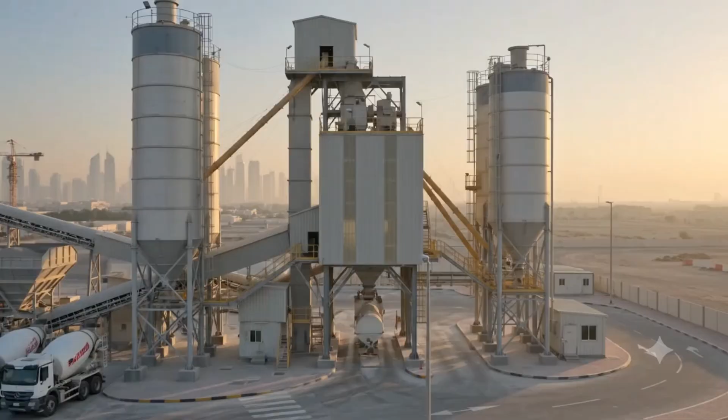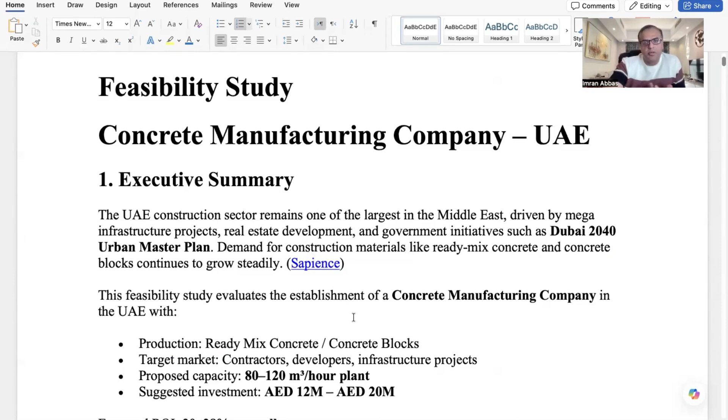The UAE construction sector continues to grow, with infrastructure projects and initiatives like the Dubai 2040 Urban Master Plan. This executive summary will give you an idea of how the sector is growing through 2040, and this link will help you find the growth rate of this industry. If you click it, it takes you to a page with more information, since we can't write everything here.

This feasibility study evaluates the establishment of a concrete manufacturing company in UAE. You can see production capacity here - you need to mention all these details.

Let me select a tool where I can highlight this for you.

Now you can see the ready mix concrete and the concrete blocks, the target market being contractors, developers, and infrastructure projects. So what you'll produce and who your target market is - who you need to contact for your factory's output. Production capacity, or proposed capacity, is 80 to 120 cubic meters per hour per plant. Suggested investment is 12 to 20 million.

It could be less, but it would be in that range. What would be your expected ROI? 20 to 28% annually. Payback period - how soon you'd recover your investment if you put in 12 to 20 million - is 3 to 4 years. That was the executive summary.

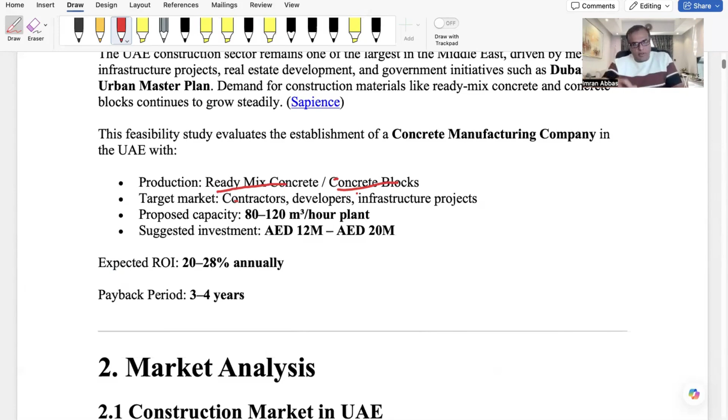Now let's talk about the market analysis. The construction industry is valued at over 130 billion US dollars, fueled by mega projects like Palm Jebel Ali and Etihad Rail. The UAE construction market is growing and is very good, worth hundreds of billions of dollars with ongoing residential, commercial, and infrastructure projects, since the real estate market in UAE is booming.

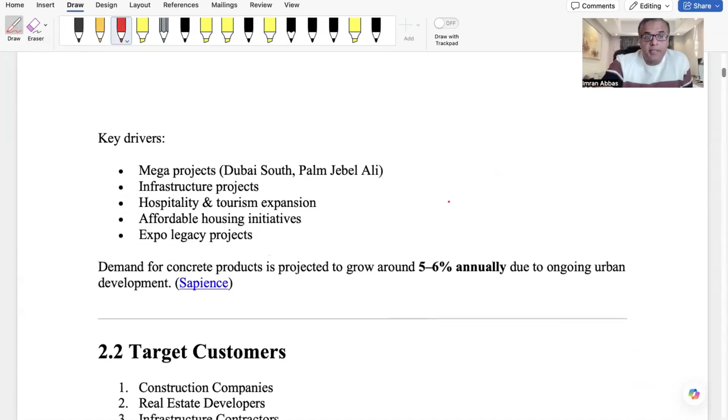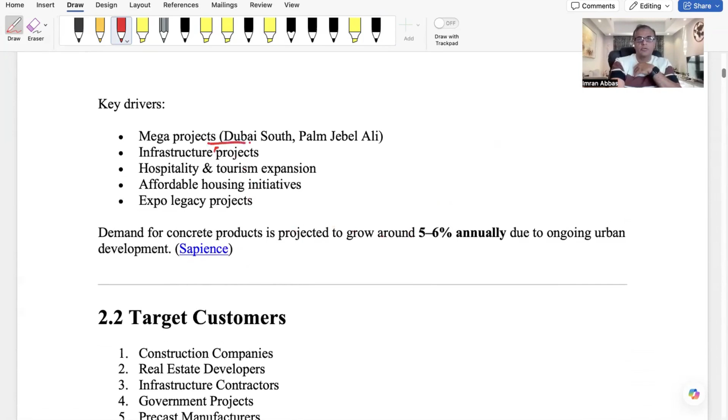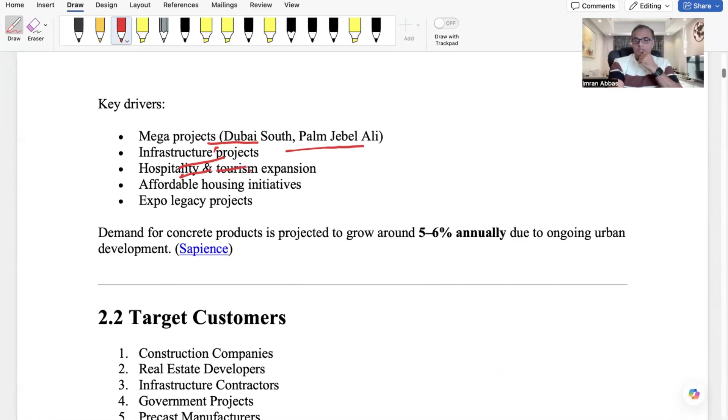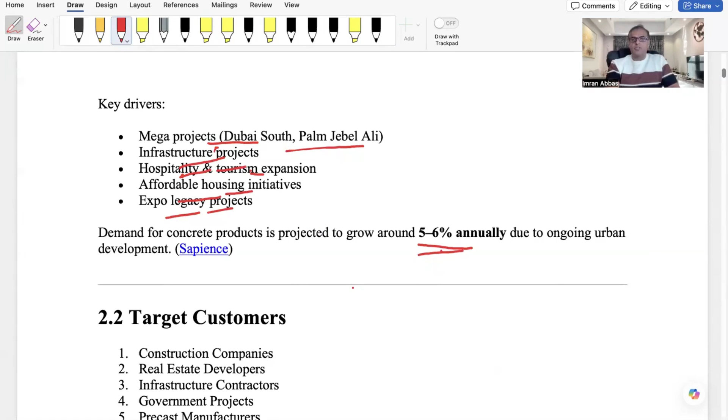What are the key drivers taking construction to the next level? Currently there's mega projects like Dubai South and Palm Jebel Ali, infrastructure projects where this concrete manufacturing company's output can be used, hospitality and tourism expansion, affordable housing initiatives, and Expo legacy projects. Demand for concrete products is projected to grow around 5 to 6% annually - this growth rate you can incorporate into your financial model or projection due to ongoing urban development. Now, who would be the target customer?

As we have clearly mentioned, your customers would be construction companies, real estate developers, infrastructure contractors, government projects, and precast manufacturers. Major customers in UAE typically include Emaar, Nakheel, and government departments.

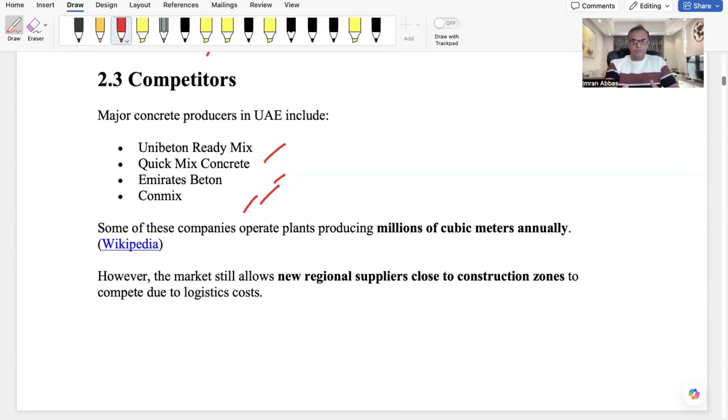Who would be your competitor? If you look at the market, definitely some companies are already doing this. You can see Unibeton Ready Mix, Quick Mix Concrete, Emirates Beton, and Conmix. These companies produce millions of cubic meters annually, so if you start, these would be your competitors.

Now let's discuss the business model. Major players like Unibeton, Quick Mix, Conmix, and Emirates dominate the market, but new entrants can compete through faster delivery and strategic location. It means deciding what kind of products you can deliver in the market.

If you set up your business model, that would include ready mix concrete, concrete blocks, precast concrete, specialized concrete mix, high strength concrete, self compacting concrete, green concrete, and thermal blocks. All these products would be the outcome of your concrete manufacturing factory. You need to decide which one you want to start and how.

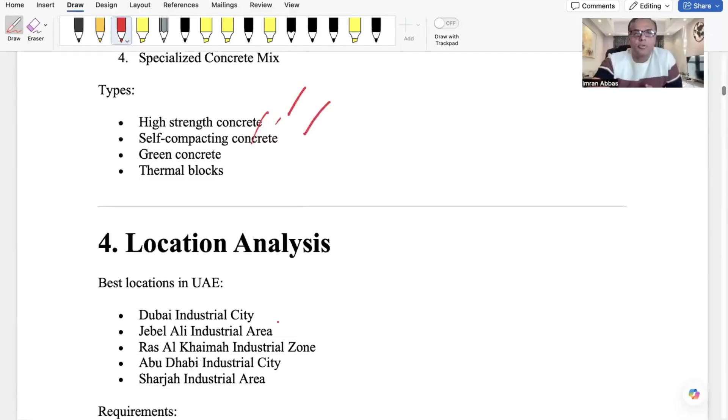Now let's discuss location selection. Ideal locations include Dubai Industrial City, Jebel Ali, Sharjah, and Abu Dhabi ICAD. If I look at the best locations in UAE, that would be Dubai Industrial City, Jebel Ali Industrial Area, Ras Al Khaimah Industrial Zone, Abu Dhabi Industrial City, and Sharjah. These are the areas where you can open and set up your factory.

The requirement is land area, which should be 10,000 square meters to 20,000 square meters.

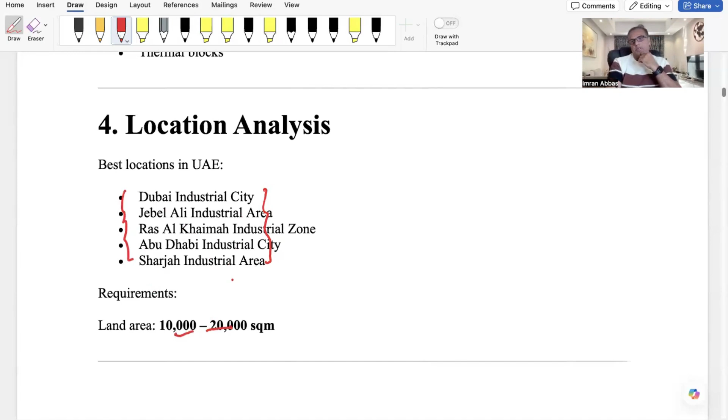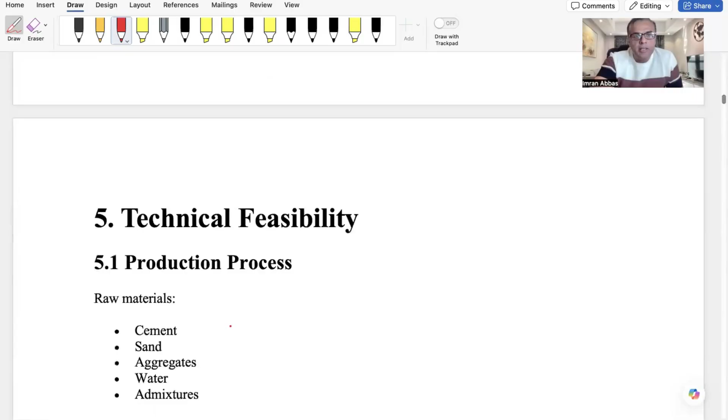Now let's discuss technical feasibility. The plant operates at 120 cubic meters per hour, producing up to 180,000 cubic meters annually, though initial utilization is lower. Let's talk about some technical things, like the production process requirements.

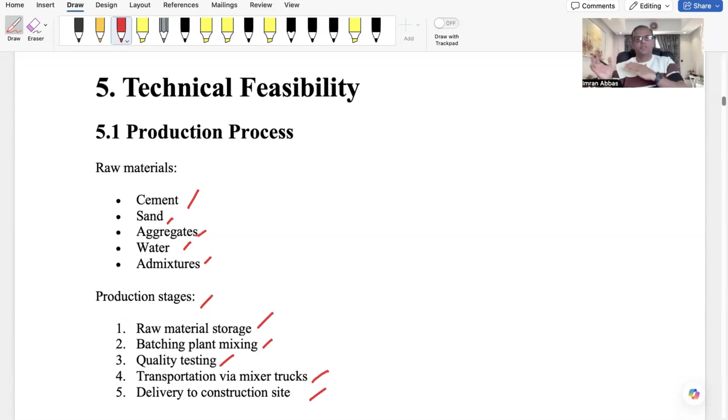The raw materials are cement, sand, aggregates, water, and admixtures. Now the production stages: raw material storage, batching plant mixing, quality testing, transportation via mixer trucks, and delivery to the construction site. So these are your production stages - raw material, batching, quality, transportation, and delivery to the construction site - that's how this process moves on.

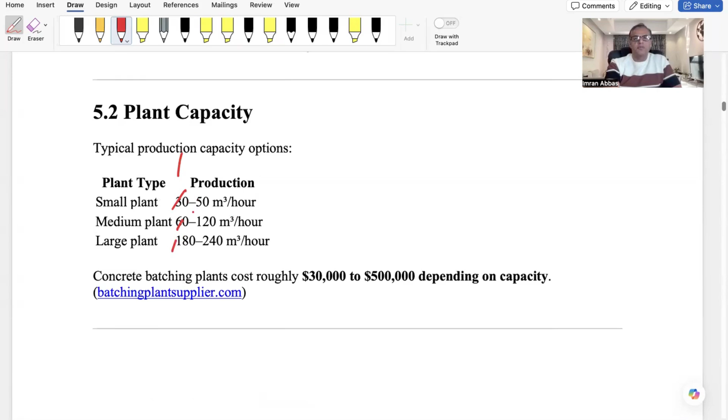So what would be your plant capacity to produce? It depends on which plant you want to acquire and at what level you want to start - small, medium, or large. That means 30 to 50 production capacity cubic meters per hour, then 60 to 120, and 180 to 240, depending on the plant. Concrete batching plant costs roughly 30,000 to 500,000 depending on the capacity, so it depends on cost and how you will move forward. That will be the plant capacity.

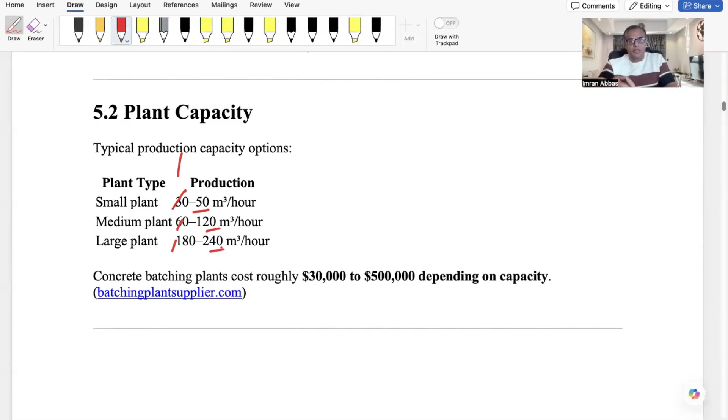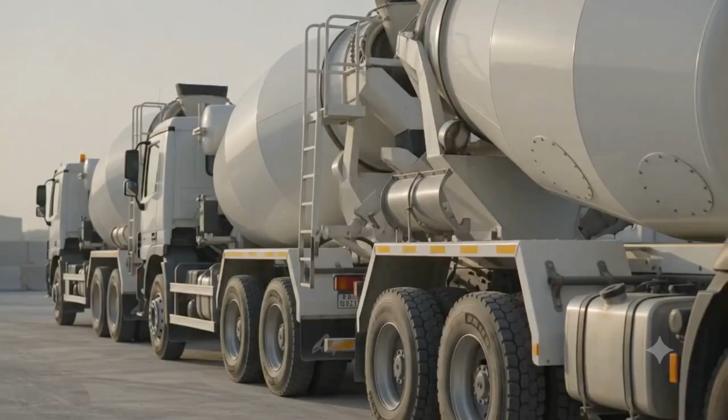Now the machinery and equipment. Core machinery includes the batching plant, cement silos, and control systems, totaling AED 4.5 million, alongside a vehicle fleet. So what would be the requirement - what kind of machines do you need? You need to see.

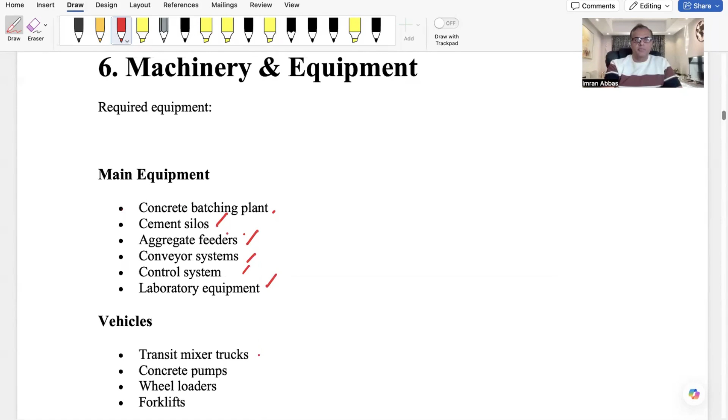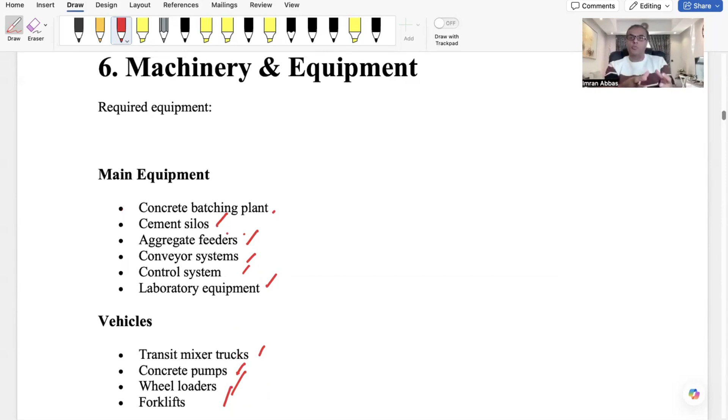In the beginning, the main equipment needed includes concrete batching systems, cement silos, aggregate feeders, conveyor systems, control systems, laboratory equipment, transit mixers, concrete pumps, wheel loaders, and forklifts - all this equipment is needed. So first the main equipment, and then the vehicles, which will take your output to the relevant customers or sites.

Now let's discuss the human resource plan. The plant requires a team of 24 employees, including engineers, operators, and drivers, with an annual payroll of AED 2.1 million. The human resource plan covers what staff, team, labor, or headcount you require for your project. Let me break down the estimated workforce: plant manager, engineer, lab technician, machine operator, drivers, sales team, and admin and accountant.

But how many people should there be? One plant manager, two engineers, two lab technicians, six machine operators, eight drivers, three sales team members, and admin staff. So approximately you should have 24 to 30 employees for this setup initially, but it could be more.

Now let's discuss the initial investment. Total initial investment is estimated at AED 17.3 million, covering land, machinery, vehicles, and working capital - that's the initial investment estimate.

If we talk about the items, on which stages and which item, how much the cost would be, we can estimate. The land lease and civil works require 2.5 million. Concrete batching plant requires 2 million to buy. Machinery and equipment 3 million, and 6 mixer trucks cost 3.6 million.

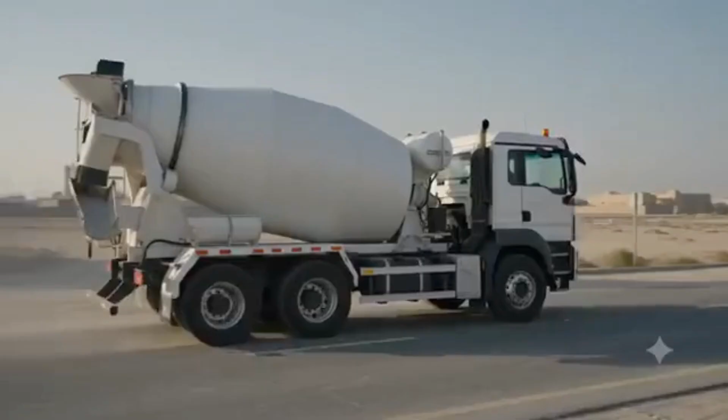If you assume production capacity of 100 cubic meters per hour, producing 50,000 per year, and average selling price of 280 per cubic meter, what would be the estimated revenue? It would be 14 million. This is just an estimation to make this clear.

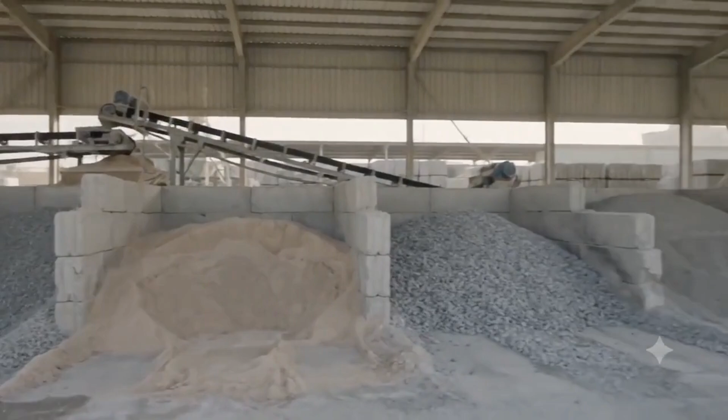Operating cost would be: raw material 6 million, staff salaries 2 million, fuel and logistics 1.2 million, maintenance 800,000, utilities 500,000. This is the annual cost basically. 500,000 for admin and marketing. OPEX means 11 million you need for the operating expenses.

So 14 million for projected revenue, 11 million is the operating cost. Definitely 3 million would be your gross profit, or total profit. That would equal 21% profit margin, or whatever name you would call that would suit you more.

So operating cost, as I mentioned to you - sometimes the cursor gives problems - 14 million for revenue and the operating cost is 11 million.

Now let's talk about the investment return, as I mentioned. Now let's discuss the initial investment. Total initial investment is estimated at AED 17.3 million, covering land, machinery, vehicles, and working capital.

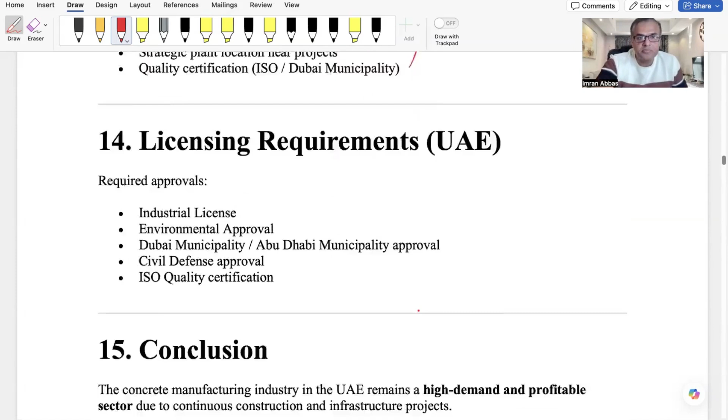Licensing requirements - what would be the licensing, how to get the approval, from Dubai, whatever authority is there. First of all, you need to apply for the trade license, industrial license.

Then you will go for environmental approval, then Dubai municipality or Abu Dhabi municipality approval, then civil defense, ISO quality certification - or probably more, depending on the current requirements when you check.

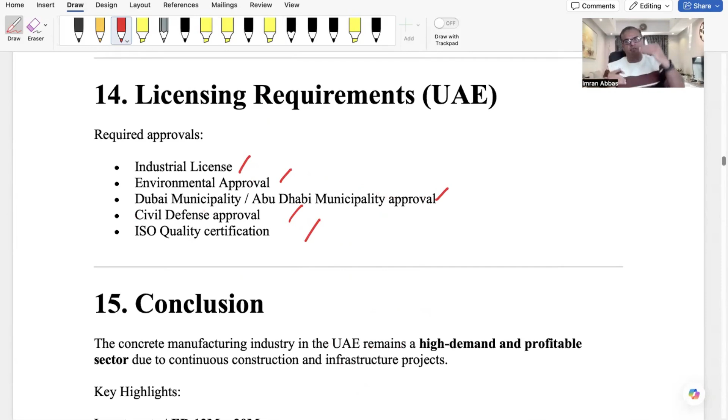So the conclusion is that the concrete manufacturing industry in UAE remains a high demand and profitable sector due to continuous construction and infrastructure projects. This is very clear and understood.

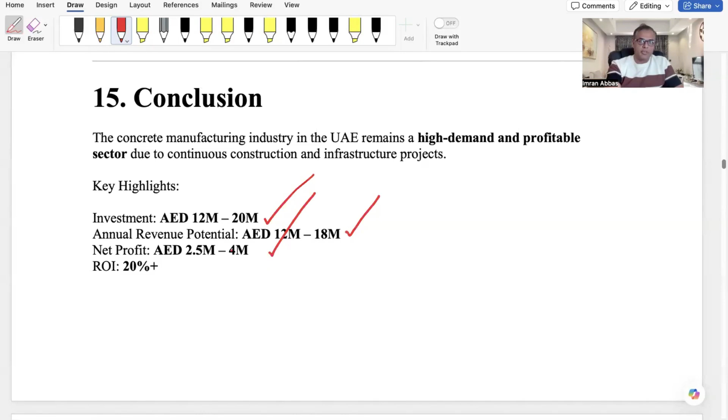You can see the investment requirement here. Annual revenue potential, as we've seen in this case, is 14 million, but you can estimate 12 to 18 million. Net profit was 3 million, but you can estimate 2.5 to 4 million. And ROI would be 20%. You can see this one as well.

In the next part, we'll go deeper, presenting a more detailed, professional feasibility study framework for this concrete manufacturing company, structured like a bank-ready, investor-ready report.